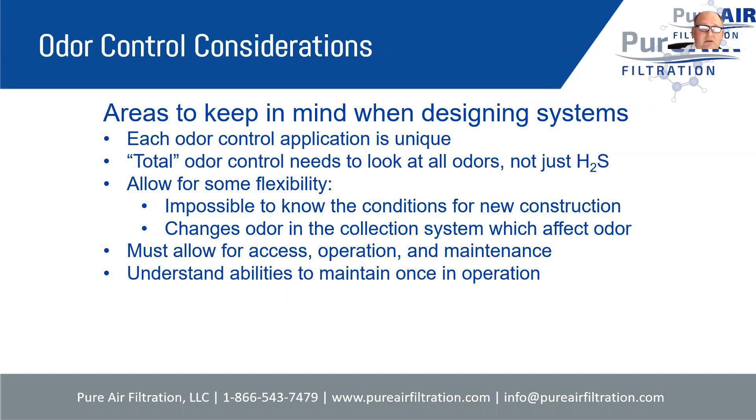So let's talk about the different types of odors. There's fresh sewage odor, basically referred to as fecal odor, which is sewage that's come just from the houses and hasn't developed a whole lot of hydrogen sulfide. Of course, there is hydrogen sulfide - that's the primary focus of the odor control industry.

Without a doubt, 99% of what we're removing in most of our applications, we are focused on hydrogen sulfide. Where there is wastewater odor, there is most likely hydrogen sulfide. So it's important, but also keep in mind mercaptans and other reduced sulfur compounds, ammonia and amines, and even volatile organic compounds can be a factor as well.

These reduced sulfur compounds can really be nasty odors at very, very low levels. We'll talk about that a little bit more, but it's important to make sure you're addressing those as well.

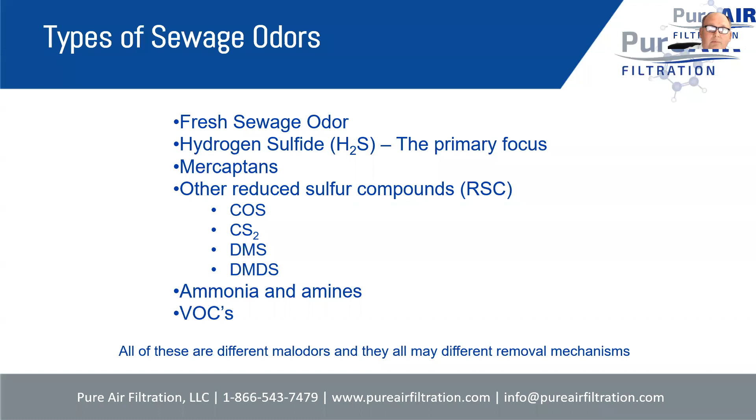Mercaptans are measured at the part per trillion level. We've got plenty of others in the parts per billion and parts per trillion level. But take a look at ammonia - we're typically only smelling ammonia at the parts per million level.

We get a lot of inquiries where people are looking to take odor out of a wastewater application, and they're concerned about hydrogen sulfide and ammonia. Generally, we don't see ammonia creating many odor issues, typically because you just don't smell it at fairly low levels. You really have to understand what's the beast you're working with and trying to tame that beast. Certainly some of these other odors are much harder to tame, and others are a little bit easier.

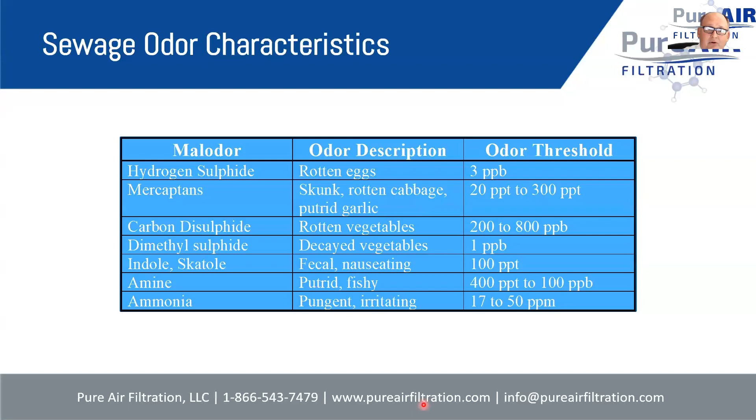So how do you go about figuring out what odors you have in your system? Let's say you're working on an existing application, you've got an odor problem, and you need to define what that problem is. There are some very good tools on the market readily available for you to work with. Many of these can be rented or purchased, and we'll discuss a couple of them.

Probably one of the biggest tools in the industry is the OdaLog or Accrulog. The OdaLog has been out for a number of years, more than 15, and has been a standard in the industry for collecting hydrogen sulfide data. It's a very nice tool, but it's gotten a little out of date as far as some of its capabilities. Along comes the Accrulog as a competitor, offering a nice interface, Bluetooth connection, and even a cellular connection so you can check your data remotely.

Very nice device - you can easily find these on the internet. They're distributed in the US by Detection Instruments, who are really good people; certainly would recommend them. Both devices are distributed by Detection Instruments, but I definitely recommend looking at the Accrulog. It's a very nice product.

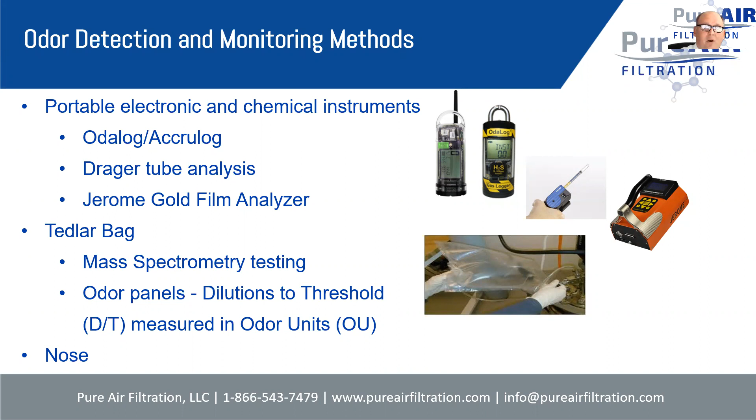So, in summary, there are lots of different types of malodors, bad smelling odors, and the level and mix is constantly changing. So when you're selecting a system, you have to keep in mind that these malodors are detected at extremely low levels, in the ppb or parts per trillion levels. And different odors may need different types of treatment. Not every odor is the same, so you need to consider that when you're taking a look at the odors.

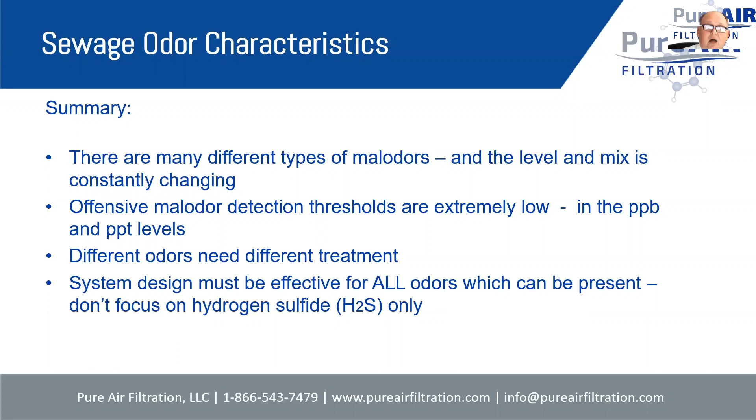And typically, we recommend that you design your system to be effective at all odors which are present. Don't just focus on hydrogen sulfide. We've seen lots and lots of cases where hydrogen sulfide is the focus, and the system does a great job of removing hydrogen sulfide, but it leaves behind a lot of other odors which people are unhappy about.

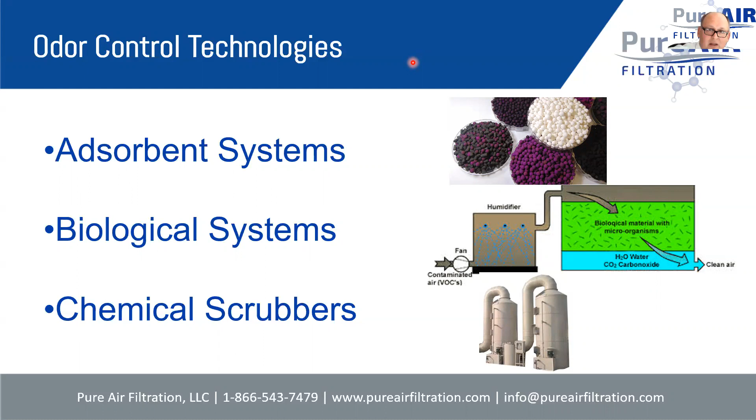So today we're going to take a look at odor control technologies. In general, we are going to focus on just 3 technologies. These are kind of 3 standard technologies used in the odor control, especially the wastewater odor control market. So the first is adsorbent systems. The second is biological systems. And we're going to spend a short amount of time on chemical scrubbers. I'll be very frank with you, I am no expert on chemical scrubbers, and I don't offer a whole lot of expertise in that area, but there's a little bit of information in here that I can assist with.

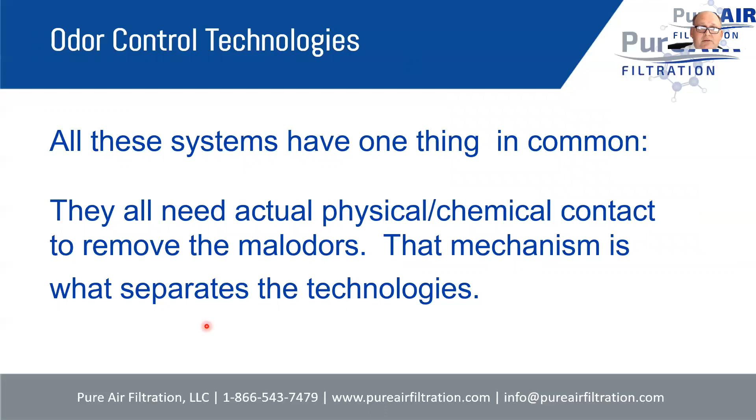So taking a look at those 3 technologies, what do they have in common? They have one thing in common: they all need some type of physical or chemical contact to remove the malodors. The mechanism, it's just the difference in mechanism that separates the technology, right? So they have to have some contact with the odor in order to remove it, to reduce it, to react with it, to eat it. Being able to understand the amount of contact and the type of contact that has to happen is very important when taking a look at these odor issues.

We'll also mention, when taking a look at systems selection, the type of technology you're going to use - you want to consider the efficiency of removal, the reliability of the system, initial cost, operating cost, footprint space, ancillary buildings if you need storage of chemicals, and maintenance and operational concerns, understanding the willingness of your client, how much time they're willing to spend with the system.

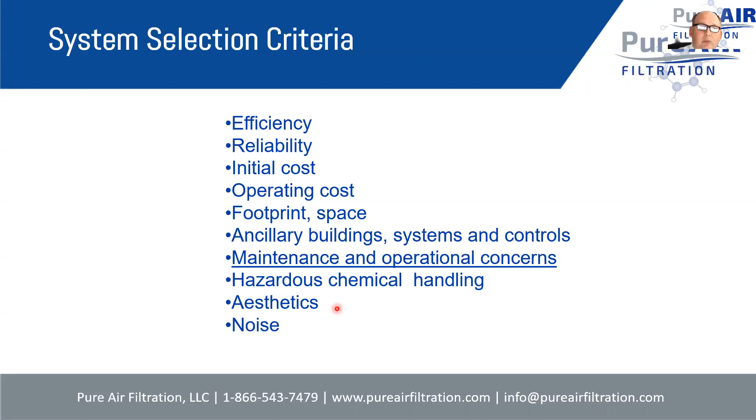Hazardous chemical handling is very important these days. Some of these systems can use very hazardous chemicals, so you want to make sure whether a client is concerned about that. And of course, aesthetics and noise are big issues in the industry as well - no sense in fixing an odor problem and creating a noise problem for neighbors.

So here's a selection chart I've come across in taking a look at various odor control systems. Now this doesn't mention chemical scrubbing, and I'll probably work on adding some information about that. But this is a selection chart you can generally use based on hydrogen sulfide levels versus airflow. In general, as your airflow goes up, various technologies become more significant, or the higher your H2S level or odor level in general, other technologies tend to take over. In some cases, a hybrid technology might be used where two technologies together provide a solution.

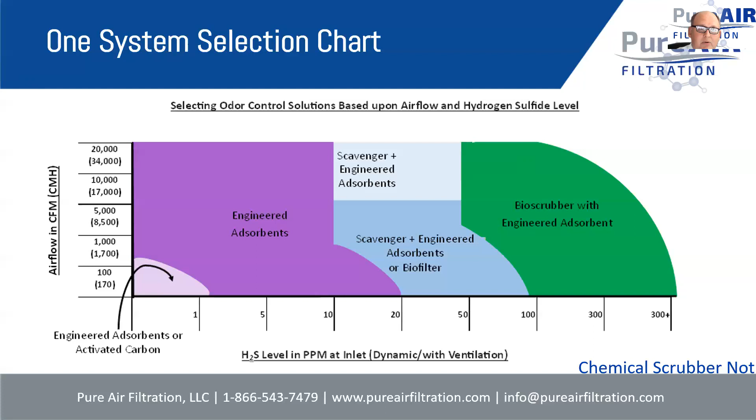So the first type of technology we're going to take a look at is adsorbent technologies. Very often this is referred to as activated carbon technology, and that's the basis behind the technology, but there are a lot of other adsorbents available on the market these days that go beyond activated carbon. So let's take a look at activated carbon.

For activated carbon, sometimes people refer to it as charcoal - it's charcoal with an additional step, this activation step. Generally, activated carbon has been used for a long time for capturing odor and purifying air. It's a good general odor capture, capturing lots of different types of odors. In general, it has a low capacity for inorganic odors, but it's great for organic odors, volatile organics - really great at that.

Keep in mind, activated carbon is made of carbon molecules, and carbon is attracted to carbon. So inorganic molecules that don't have carbon typically don't have a great affinity for activated carbon. Also keep in mind that activated carbon is actually a physical process of holding odor - these odors go into the activated carbon and are held inside, but they can actually be desorbed, meaning odor can come back out of activated carbon. So you need to be careful, especially when the activated carbon is near the end of its life, fully consumed - it tends to let some of that odor out occasionally.

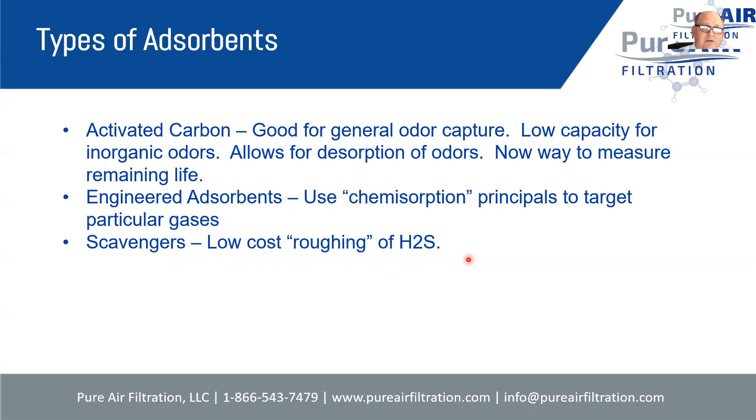Over time, engineered adsorbents have been developed. These engineered adsorbents typically use a chemisorption principle to target particular gases - we're going to talk about chemisorption coming up. So engineered adsorbents basically take activated carbon and other substrates and beef them up to get additional performance out of them. We'll also talk briefly about scavengers - these are just low-cost roughing products focusing primarily on hydrogen sulfide. We'll look at an example of that as well.

So the technology for adsorption is also referred to as gas phase adsorption. How does gas phase adsorption work? These adsorbents, activated carbon being one of them, have a huge number of microscopic pores inside them - very, very small, typically just a little bit larger than the molecules being adsorbed. These odorous molecules find their way into the pores of the adsorbent and are trapped inside. In activated carbon specifically, there's a weak molecular attraction that holds those molecules in the adsorbent - kind of a magnetic principle.

If you think about it that way, it's a van der Waals effect, that's the technical term. Basically, molecules stick to molecules, and in this case, odorous molecules go into the activated carbon and they stay in there in most cases. Sometimes they desorb. So that's generally how gas phase adsorption works.

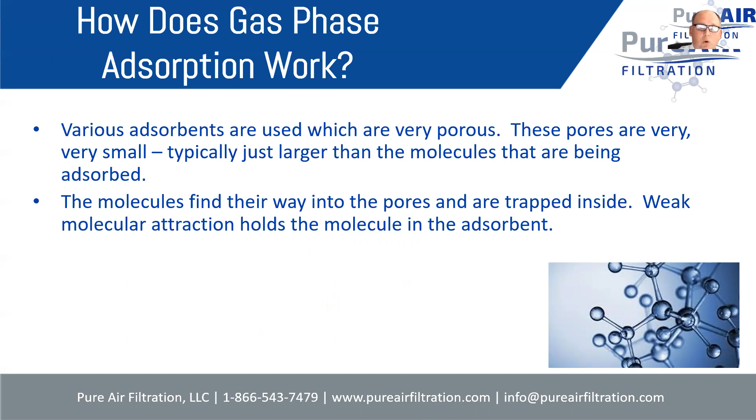Let's talk about the difference between adsorption and chemisorption. Adsorption is spelt with a D, and there's a difference between absorption and adsorption. Adsorption with a D is when something goes into an adsorbent, it's captured on the inside.

So it's very much a principle like a sponge. If you think of an adsorbent to be like a sponge, activated carbon is like a sponge for gases. If gases go into activated carbon, it's just like water going into a sponge. It's bound onto the inside and it's kind of carried throughout that entire sponge. But like a sponge, if you squeeze a sponge, the water comes back out. The same thing can happen with activated carbons.

Under the right conditions of stress, typically a change in temperature, a change in pressure, or a change in humidity, those gases can come back out. So that's the adsorption and desorption principle with plain activated carbon.

A subset of adsorption is referred to as chemisorption. Chemisorption is when the adsorption principle is used, but a chemical is added to the adsorbent. The gases go into the adsorbent, and then there's a chemical reaction that occurs while it's in there, and the gas is converted into a solid and held on the inside permanently.

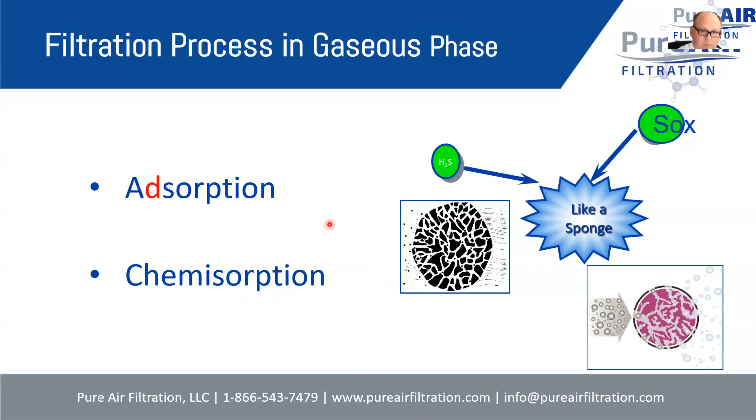Just to give you an idea about these pores I've been speaking about, here is a micro view of activated carbon, and you can see under an electron microscope what these pores look like. These typically were originally the cell walls of some plant from prehistoric times, before it was turned into activated carbon, whether it comes from coal or whatever the substrate was ahead of time.

Gases go into these pores and they bind into the side of these pores. Now, the incredible story about activated carbon and why it works so well is that one gram of activated carbon has about 1,100 square meters of surface area. If you counted up the area of the surface of every one of these pores of one gram of activated carbon, you get about 1,100 square meters. That's about the size of a football field.

So if you spread out activated carbon, you could spread it out across a football field. It's just an incredible amount of porosity, and we use that porosity as an advantage when working with adsorbents.

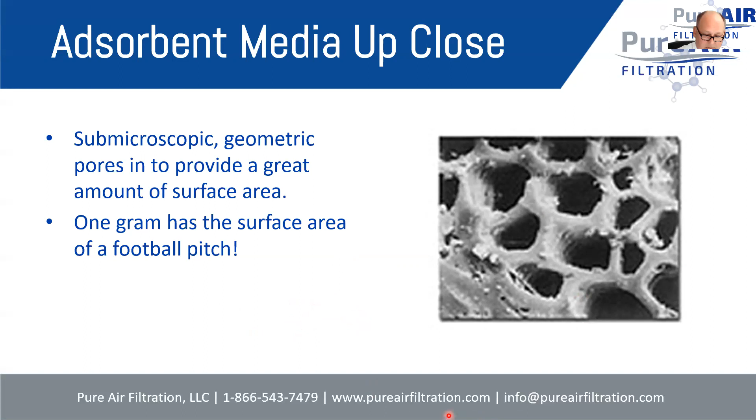So again, adsorption is a physical process. With activated carbon, it's typically reversible. Chemisorption is adsorption plus a chemical reaction, and typically you're working with impregnated carbons, catalytic carbons, or some other type of physical and chemical reaction.

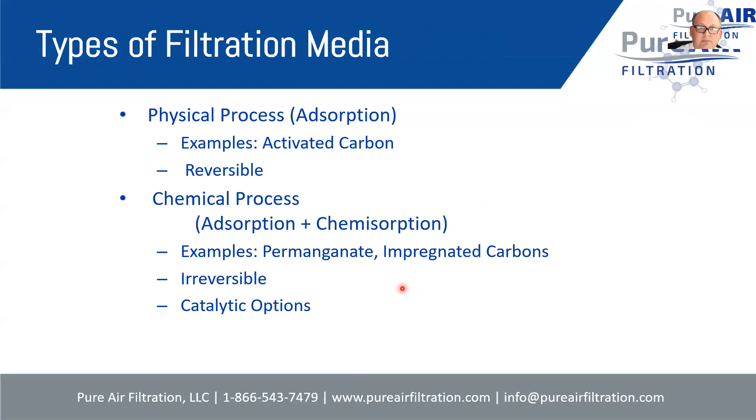Just some quick information on activated carbons. Keep in mind, activated carbon can be made from lots of different forms of carbon. You can have coal-based carbon, coconut shell carbon, nut shell carbon, lots and lots of different sources for the charcoal, which is the basis of activated carbon. The key is that different types of activated carbon have different pore sizes, and different pore sizes are better or worse for capturing different molecules of different sizes.

Very often in our industry, people focus on coconut shell activated carbon. There is a misnomer about coconut shell activated carbon. It is one of the best activated carbons as far as capacity goes, but mainly for capture of volatile organic compounds. It really doesn't have any better capacity for inorganics such as hydrogen sulfide, but there's a misconception in our industry that coconut shell based activated carbon is the best activated carbon. It is the best, but only if you've got a VOC, a volatile organic compound, application. In general, just about all other plain activated carbons have about the same capacity as coconut shell activated carbon.

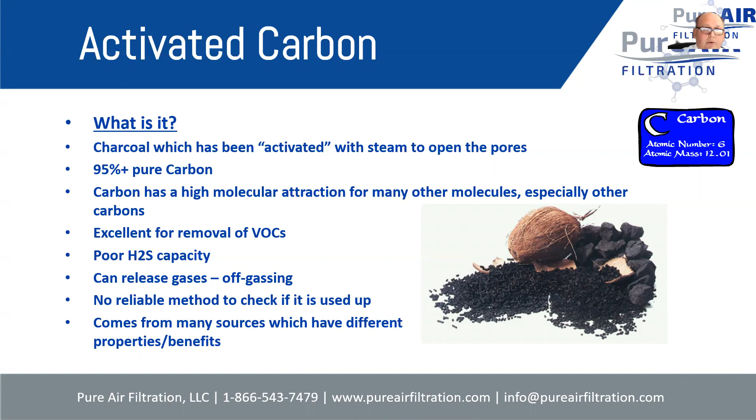Large molecules get caught in large spaces, while small molecules can feed down into these channels and get caught in small spaces. That's why certain activated carbons work better for certain gases than others. An activated carbon with a high amount of microporosity is very good at capturing very small molecules, while one with larger porosity is better at capturing large molecules. That's the difference between activated carbons.

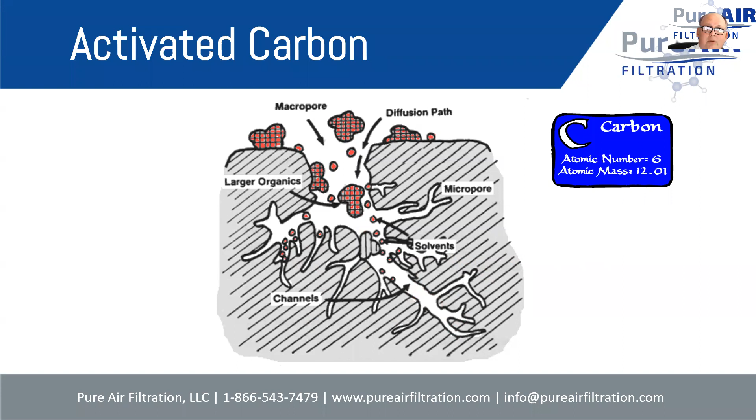We often get questions about carbon regeneration. If you're using activated carbon, and we do use some in some of our applications, can that activated carbon be regenerated? The answer is yes, it can be. There are actually two types of regeneration possible. We'll address those briefly.

The first is kiln desorption regeneration. I mentioned that activated carbon has the ability to desorb the gases it's caught. So if you take an activated carbon and return it, typically to an activated carbon manufacturer or a specialty regeneration site, they will run that activated carbon through an oven. That will heat the activated carbon up so much that all, or most, of the gases it collected will leave the carbon.

Typically those gases are then burned in the furnace, and the activated carbon can then be put back into use. The difficulty is you have to actually remove the activated carbon, send it off to a site, have it regenerated, and then return it back to the site and refill it into the system. Generally, a lot of customers don't find that practical, and instead just dispose of the activated carbon and buy new.

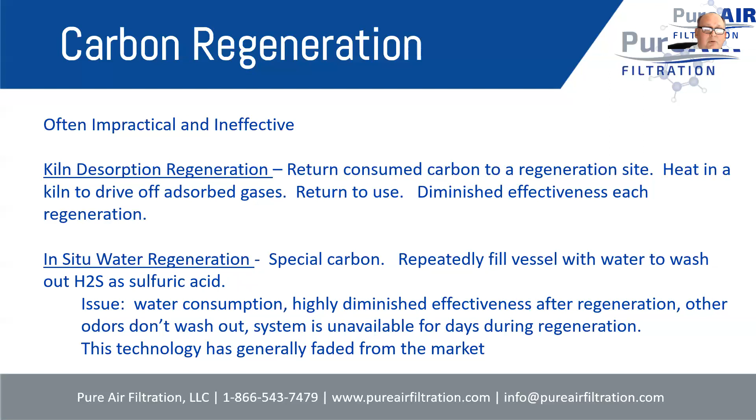So we'll talk about chemisorption. Now, chemisorption is adsorption plus a chemical reaction, so this is an addition to it. This is basically a process that is instantaneous and irreversible. These gases go into an adsorbent, go through a chemical reaction, and are converted to another molecule, typically a solid, where they're held permanently. So generally after that reaction, the product is non-hazardous because you've taken a product like hydrogen sulfide and neutralized it, and it's typically pH neutral at that point.

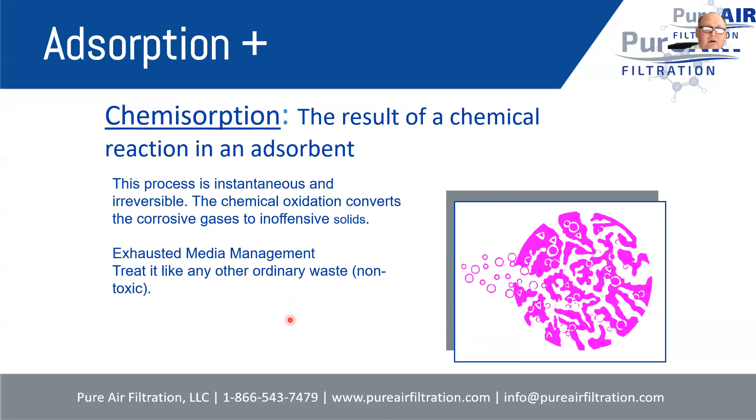We talked about activated carbon. Another one is alumina, aluminum oxide. This typically goes by porosity or surface area. Activated carbon has the highest surface area, about 1,100 square meters per gram. Activated alumina is what this product looks like here - it's aluminum oxide, a porous ceramic bead. It has about 350 square meters per gram.

Zeolites, natural zeolites, are just a very low-cost porous product. There's a bunch of different types of zeolites, but most of the zeolite used is kind of a low porosity product for not very critical applications, typically maybe a commercial application for indoor air quality. And then there are some porous clays which are used as well, especially when it comes to scavengers.

So this is your substrate, your porous substrate, and then the chemicals that are added to do that chemical reaction, the chemisorption reaction. There's various caustics - a very popular one is potassium hydroxide or sodium hydroxide. They're basically the same. That used to be a very, very popular product, but its popularity has diminished greatly because of an increased possibility of fire with the activated carbon.

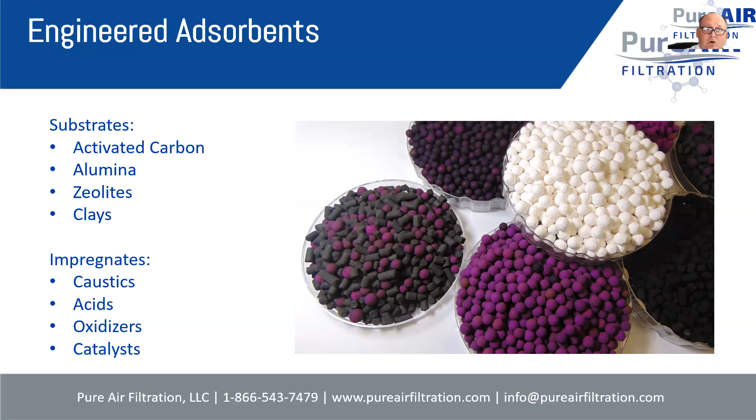We get a lot of questions from customers - well, if it's catalytic, why doesn't it work forever? We know that catalysts are not consumed during a reaction, so why do these catalytic adsorbents have a finite life, a finite capacity? The reason for that is those pores fill up with sulfur, and eventually the hydrogen sulfide can't get into the activated carbon because the pores are so filled up with sulfur, which is the end product of that reaction. So that's what diminishes the performance and capacity. Once the activated carbon is full of sulfur, then it can be disposed of.

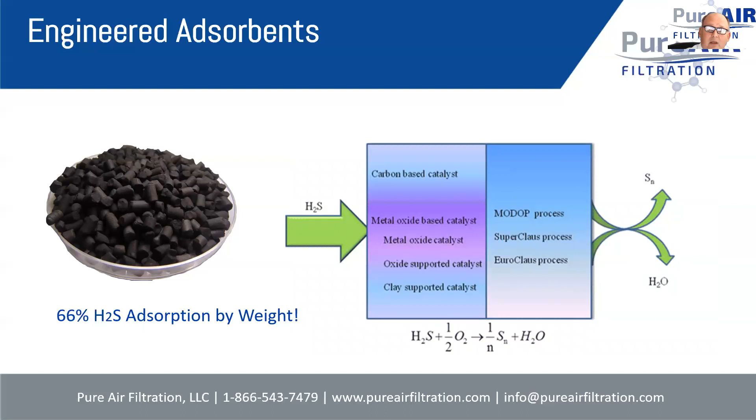The good thing about it is sulfur is non-hazardous. So typically the sulfur that's captured in the activated carbon can be disposed of without any concern for hazards.

I mentioned to you before, permanganate impregnated alumina, sometimes referred to as PIA. The material composition is activated alumina impregnated with a permanganate, typically potassium permanganate. There are various concentrations offered in the market.

How does it work? It's a chemisorption, like I mentioned, using oxidation. The nice thing about this product is it's completely non-combustible. This alumina that is the basis of it is basically a ceramic. You could put a torch onto it and it might glow orange, but it's not going to catch on fire. So it's completely non-combustible, which is very nice for some applications.

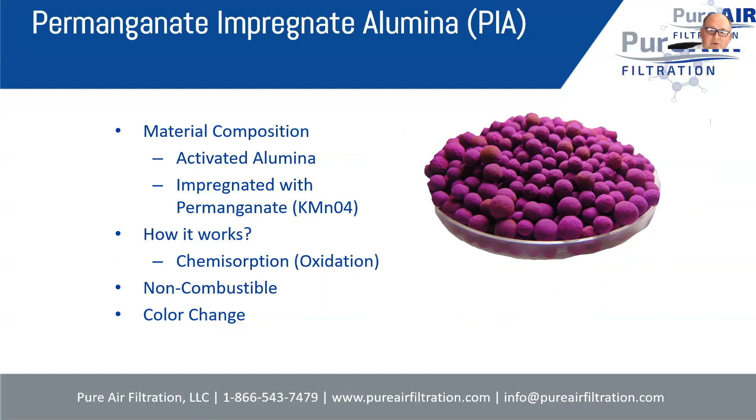And there's a color change that occurs. You can see a little bit of a color change here in some of the pellets, and that's simply due to being exposed to contaminants in the air, like sulfur dioxide or any exhaust. The product starts off with a nice purple color and eventually turns to a brownish color later on. So the color change is a nice ability.

You're using adsorption here with activated carbon, and you're using chemisorption with an oxidizer in there. So you're chasing lots of different odors with multiple technologies, we would say.

The interesting part of this product is by adding the alumina product to it, it is fire resistant. And so it typically carries a UL fire rating, which is very important for a lot of cases. Certainly fire is something that needs to be avoided.

There's also a low chance of off-gassing because you've got the chemisorbent involved, and you still get the color indicator. Even though the carbon doesn't have a color indicator, the permanganate media still has that color indicator.

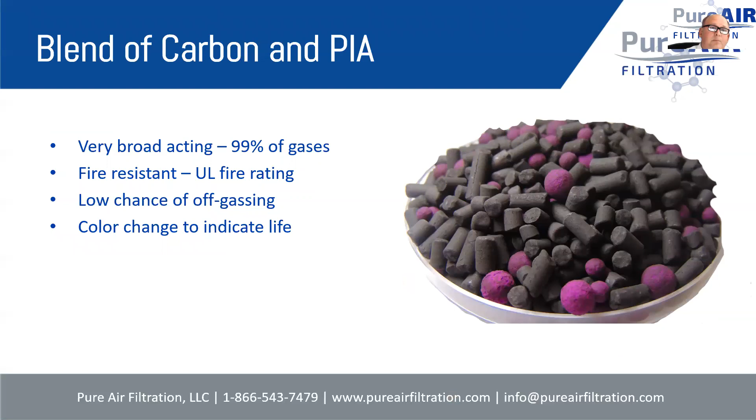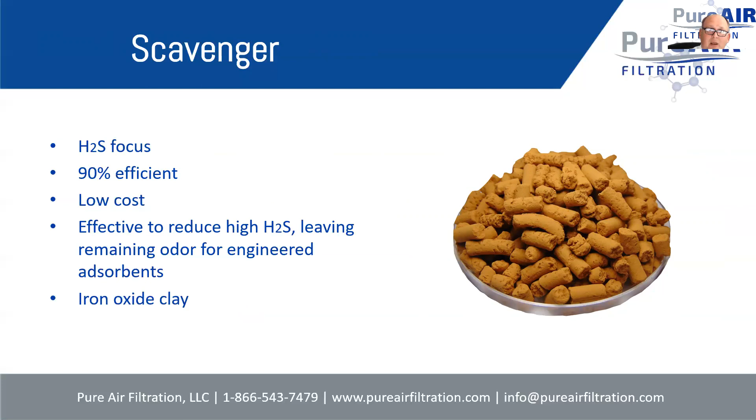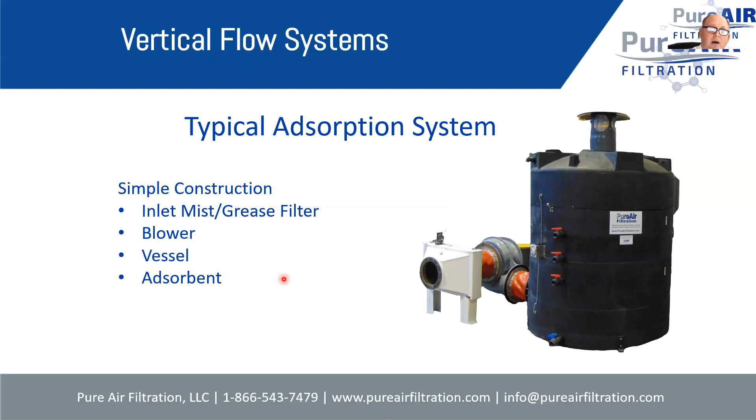Inlet filter, blower, vessel, adsorbent, very low in maintenance.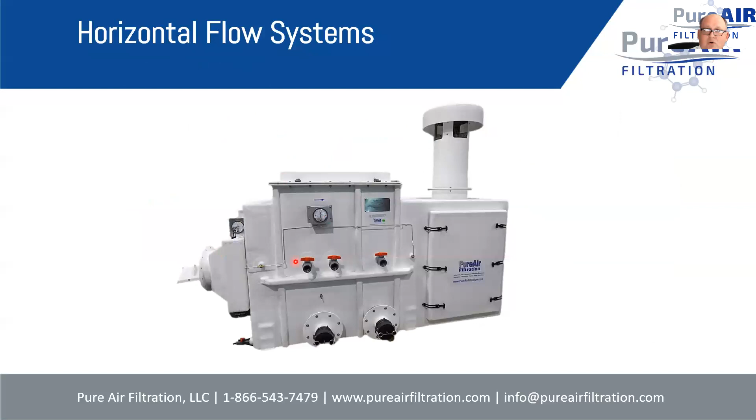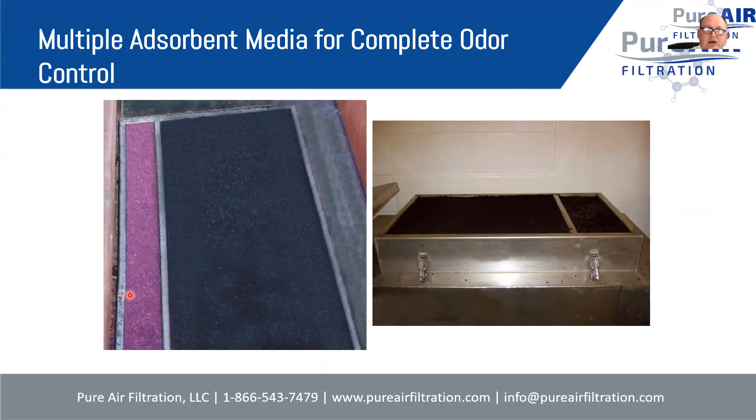Adsorbent systems can be small systems. They can be horizontal flow - you saw a vertical flow before. Here this is a horizontal flow system. Here's the mist, and grease filter we were talking about. The nice thing about adsorbent systems is you can use multiple adsorbents. We showed you that mixed adsorbent, which is one way of approaching it, but you can have separate beds of adsorbents in this horizontal flow system, so the air is flowing sideways horizontally here.

So maybe you would have two types of adsorbent. This one might be for capturing hydrogen sulfide. This one might be for capturing your reduced sulfur compounds. So you're able to have two different adsorbents in the system to capture all of your different odors in there.

So no longer do you have to worry about odor breaking through your activated carbon system and everybody panicking to get the adsorbent media changed. There's a preventative way, or a predictive way, of knowing when the adsorbent media has to be changed out through electronic means there.

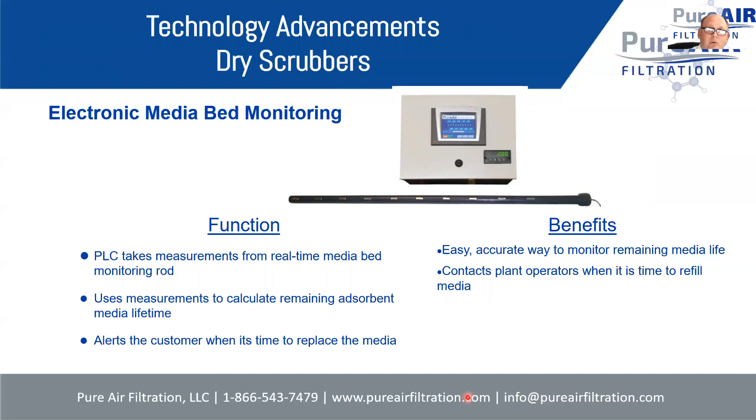So we spent a lot of time on adsorbents. That's certainly an area of primary focus for myself, but we also want to move into other technologies as well.

So biological odor control is certainly very popular and a very well-established odor control technology throughout the world at the moment. I'm going to break the technology up into two different terms where we use the term biofilter versus a bioscrubber or a biotrickling filter. There's a lot of disagreement in the industry about exactly what these devices are called and the difference between biofilters and bioscrubbers and biotrickling filters.

You'll find some people that basically say there are differences between these devices, but for our practical purposes, I'm going to define that a biofilter is a system which is typically less sophisticated, less engineered. It's typically some type of a box filled with a substrate - in this case it happens to be bark or some type of wood, cellulose type basis - and air is percolated up through this. Bacteria will grow on this mass here, and this special bacteria will eat odors.

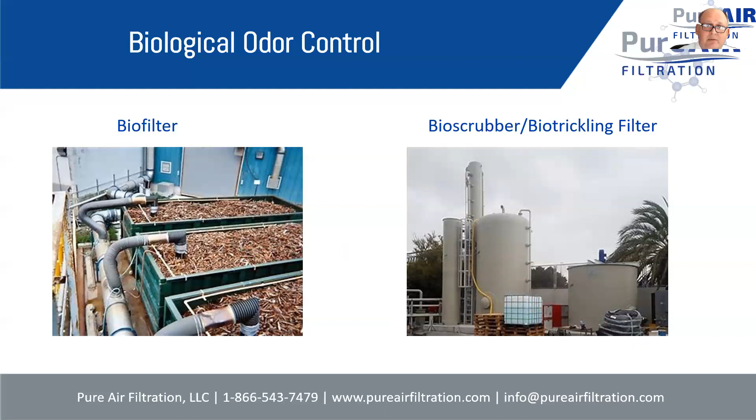The substrate here is an engineered high surface area product, and the nutrient is being injected, whereas in the other case the nutrient is just innate to the organic matter. So that's biological, and here's a schematic kind of showing the two as well.

So for a biofilter, you just have a blower. You're blowing that air through a humidifier, trying to get close to 100% humidity as much as possible. That blows into an elevated floor on your system. This can be a system like we saw on the previous page, which looks like a dumpster basically, or it could be a poured concrete subgrade structure, just depending on what you've got to work with. And that air percolates up through this filtered media, and the odor is captured in here. There is going to be draining of liquid from the bottom from this humidified air, and that drains typically back into the humidifier or drains to be treated.

Here's the schematic of a bioscrubber. So again, we've got a fan that's blowing in the gas. The gas is actually blowing up through this packed column, and that's the key. In the industry, different people use different types of substrates, but the key here, of course, is surface area. As I mentioned, there is a spray system spraying in either recirculation water or sometimes once-through water. As this bacteria grows, it eats the hydrogen sulfide. There is a waste product from the bacteria, which ends up getting captured and then goes to drain from there as well.

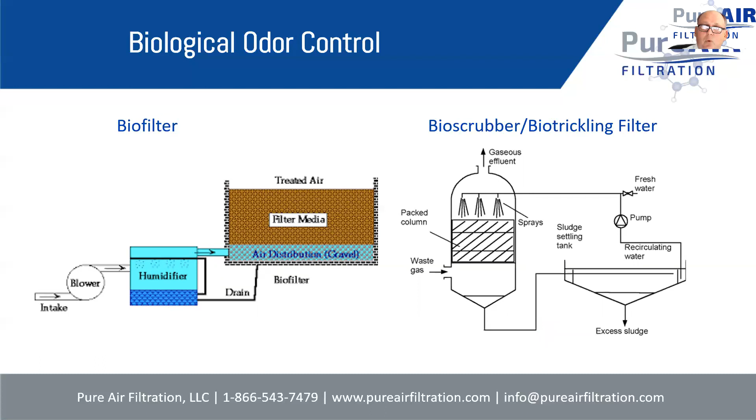So taking a look at a biofilter, it's very simple, low material cost, low maintenance and construction cost. It generally has fairly broad odor removal, so certainly takes out hydrogen sulfide, but there are other bacteria that can grow in there to focus on other odors as well. It's typically good for low odor levels; we're not typically looking at a biofilter for high odor levels. Typically, residence time for a biofilter is about 30 seconds. Just a general rule of thumb is that you need to have the air inside of that mass for about 30 seconds.

A bioscrubber or biotrickling filter is very often hydrogen sulfide focused. They're really excellent for applications where you've got high hydrogen sulfide levels. You can have recirculation or once-through applications. The recirculation systems are focused specifically on having really high performance at removing hydrogen sulfide, because recirculation allows you to maintain optimal conditions for the type of bugs that like hydrogen sulfide. A once-through system will also take out hydrogen sulfide, typically not at the efficiency of a recirculation system, but it can also grow additional bacteria, which might remove some of your other compounds too.

Certainly more complex - there are pumps and pH indicator meters and things on there. So they're more complex than a biofilter for sure, though certainly not extremely complex. It does need freeze protection.

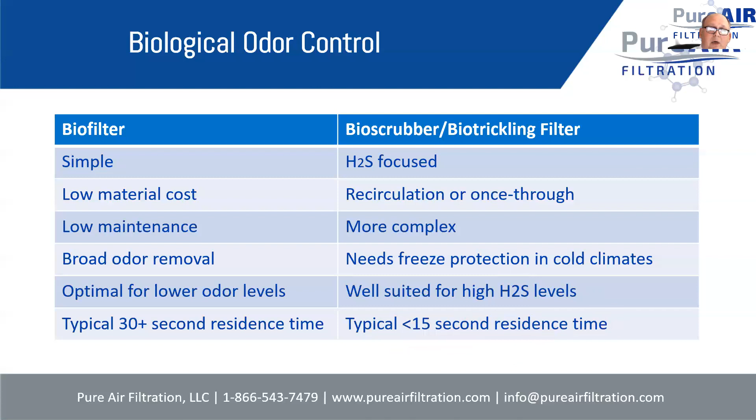So let's talk about chemical scrubbing. Again, I mentioned in the beginning that I'm certainly not an expert in this area. I did consult with a friend or two in the industry to discuss chemical scrubbing and to get some information here.

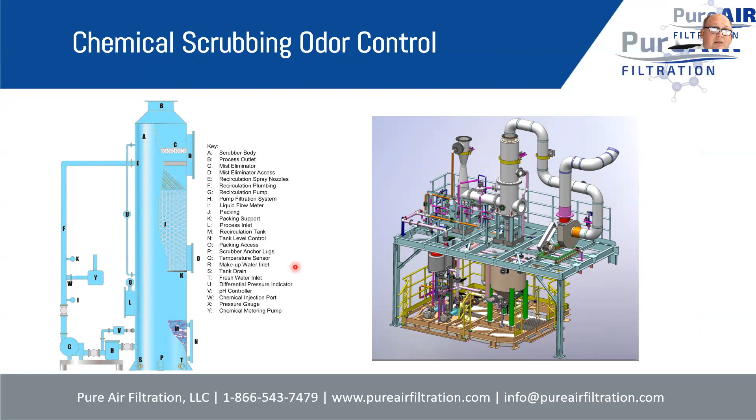The key with chemical scrubbing is it can be fairly complex. You see some examples of these chemical scrubbers - this actually looks a lot like a biological scrubber, and generally they're set up very similarly. It's just that there's a chemical reaction occurring instead of a biological process. In general, odors or gases are passed up through a column where there's a spray and packing. A similar issue - you need surface area for the reaction to occur.

The key here with chemical scrubbing is the chemical use. Chemical scrubbing was much more popular in the past, but the chemicals used in chemical scrubbing are typically very concerning from a safety standpoint. In general, the liability of having those chemicals available and all the ancillary necessities of dealing with those hazardous chemicals make these less attractive. Certainly in many applications, it makes some sense.

So you can see here a wet scrubber, which is typically being used in an industrial process. You can see they can be very complex. They're very good for constant flows, and in general, my contact in the wet scrubber industry says that if you're looking at 20 to 100 parts per million for hydrogen sulfide, they are good, with an airflow typically of 10,000 to 50,000 CFM. So wet scrubbers, chemical scrubbers - you're typically looking for higher airflows where it makes sense, and typically for higher gas concentrations as well.

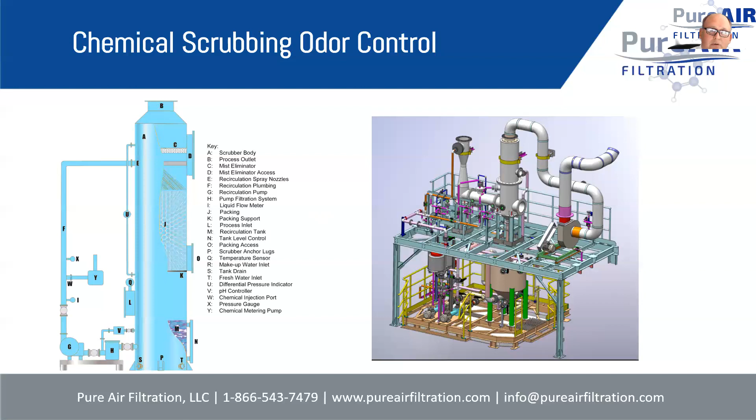So taking a look at this - chemical scrubbing is typically focused on one gas. You can have multiple gas systems, but it's basically multiple sections or multiple towers of different chemicals, because if you have multiple gases that you focus on, you have to have multiple reacting chemicals, and they typically can't be mixed. These systems have high concentrations of reactive hazardous liquids.

Maintenance is very significant here. These hazardous chemicals are tough on pumps and sensors and such, so maintenance can be very significant for a chemical scrubber. They also have to be designed at the maximum gas level, because you have to have the reaction set to work at your maximum gas level. So if you have a fluctuating odor level or fluctuating gas level, that means the system has to be designed at whatever your peak is, whereas some other technologies, like adsorbent technologies, are designed for your average gas level.

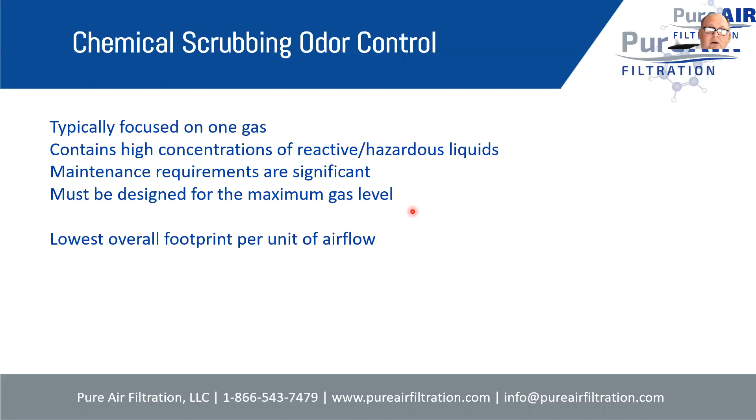Wet scrubbers or chemical scrubbers have to be designed for your max gas level. In general, though, they have the lowest overall footprint per unit of airflow, so you can get really high airflow through these systems in a low footprint with a chemical scrubber.

Coming near our end, we've got just a few more slides, a little comparison of technology. We'll forward this to you to take a look, but we've basically broken it up into activated carbon, whose advantages are low maintenance and high efficiency, and disadvantages are the periodic replacement required and generally low capacity for hydrogen sulfide. Engineered adsorbents take a step beyond activated carbon. They're low maintenance as well, high efficiency, with lots of different configurations. You can have multiple adsorbent medias and multiple flow directions. The disadvantage is it does require periodic replacement, typically less than activated carbon, but it's still required.

A biofilter generally has no hazardous chemicals involved, so that's very nice. It's typically a low maintenance system, but when it does require maintenance, it requires a lot of it, getting in and changing out the biomass, which isn't a great job. Typically that's only occurring every 3 to 7 years from what I hear, so that works fairly well. Generally they have a very large footprint though, so you're not going to see many biofilters in urban areas where land is a resource. These are typically farther out, away from urban areas.

A bioscrubber doesn't have any hazardous chemicals. It's very often considered a green technology, and it's especially effective for hydrogen sulfide. There are lots of other possibilities for it, but generally it focuses on hydrogen sulfide. Bioscrubbers do have some significant maintenance, so you need to be aware of that. They need to be watched, there are sensors and pumps that do need occasional maintenance. They also have significant water consumption, especially a once-through system, which will use a lot of water. A recirculation system will use less, but you still need some water for it.

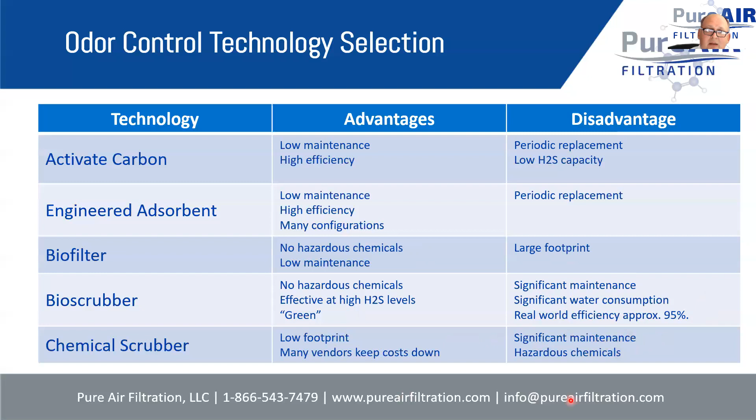Chemical scrubbers have a low footprint, and there are lots of vendors out there for them. They're very much available all over, and it's typically fairly easy to design these. The companies that sell the packing towers offer lots of great support with these chemical systems. The biggest concern is the significant maintenance and the hazardous chemicals involved with it.

So I guess in conclusion, total odor control is possible. You've got to be careful about your selection of odor control, and it requires certainly some knowledge or assumption of the conditions the system's going to see. I would say one of the most interesting solutions out there is the hybrid technologies offered, where, for instance, you use a bioscrubber to greatly reduce your hydrogen sulfide level, and then use an engineered adsorbent system afterwards to capture any remaining odor. These are very, very successful, and customers really like having this hybrid technology working together.

Same with the hybrid technology of scavengers followed by an engineered adsorbent media. So I mentioned you can have a system which focuses on high hydrogen sulfide levels, using a low-cost scavenger to reduce that hydrogen sulfide level. It won't completely eliminate the hydrogen sulfide or other odors that might exist, and then you follow that with an engineered adsorbent, which is focused on really high efficiency and broad odor removal as well.

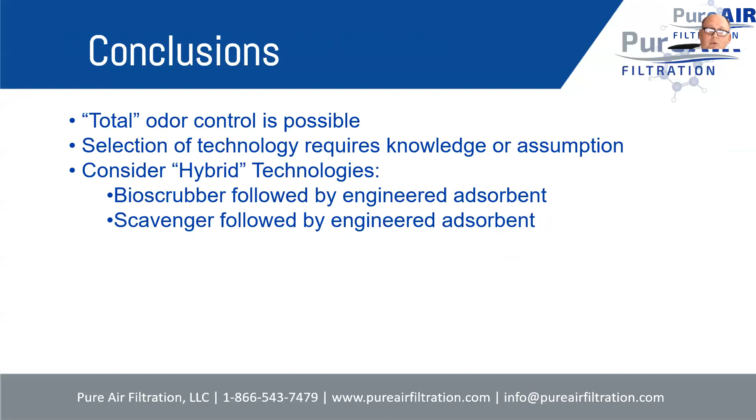So I wanted to thank you for your time today. Hopefully this webinar was helpful to your understanding of the odor control market. You are certainly welcome to ask any questions.